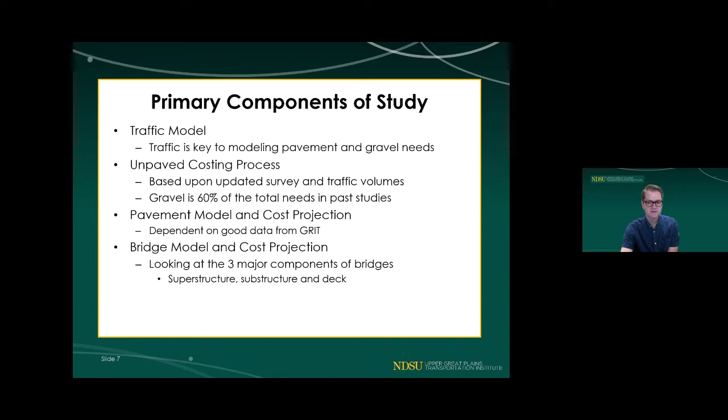Finally, the bridges across the state are analyzed to estimate the 20-year replacement and maintenance needs. The updated bridge analysis method focuses on the superstructure, substructure, and deck.

As mentioned in the previous slide, the impacts to all roads are dependent upon traffic levels. First off, for unpaved or gravel roads, more traffic results in more frequent blading, more frequent gravel overlays, and greater thicknesses when they occur. And in the higher volume roads, we see utilization of dust suppressant and base stabilization. So it's all a function of traffic in terms of maintenance. The paved roads, again, the design of the road is based upon projected equivalent single axle loads, or ESALs.

This is a measure of pavement damage due to axle loads, which is why the truck numbers are critical. The more ESALs on a road during its 20-year design life, the thicker the pavement is required. Additionally, for existing roads, the traffic estimates are used to deteriorate the current pavements based upon current condition and structure until an improvement is required.

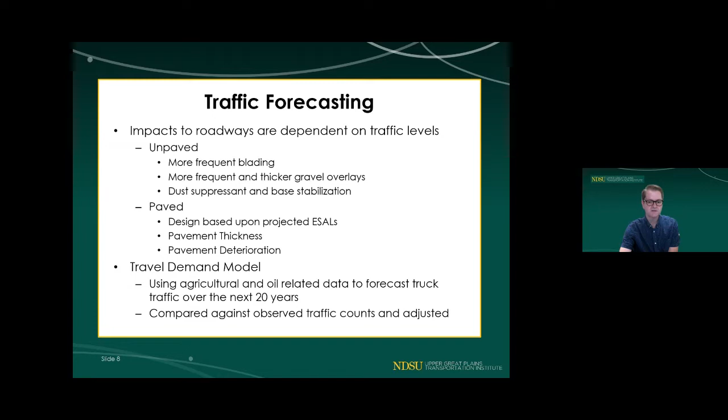The counts were collected by UGPTI staff, consultants in Western North Dakota, as well as merged with the counts that North Dakota DOT takes across the state off the state system on county roads. The study utilized a total of 1,718 counts across the state to calibrate the travel demand model.

As previously mentioned, the travel demand model focuses on two major commodity groups, agricultural movements and oil. In the ag model, we consider the top 9 commodities by volume in North Dakota. The North Dakota Department of Agriculture collects monthly elevator shipment data by commodity, which provides excellent information about the farm or farm storage to elevator movements, destinations from producers. In addition, we consider processors such as ethanol plants, crushing plants, and mills as destinations as well.

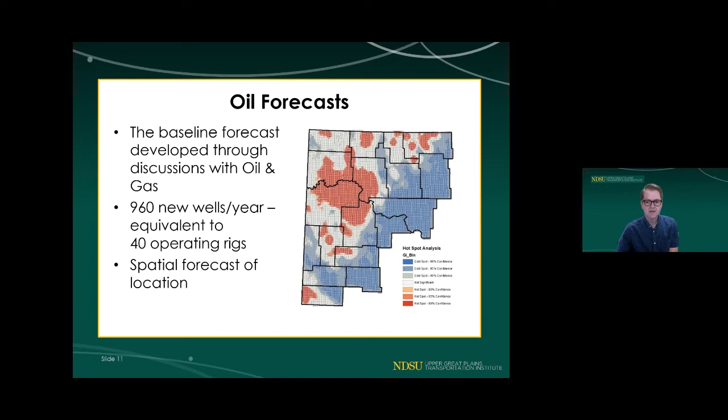The graphic on the right is the initial result of our spatial analysis of existing oil wells. The red areas, it's called hotspot analysis, which measures clustering. So denser areas of wells here are shown in red. And these spatial models are used to estimate locations for future wells.

On the ag side of things, again, we have NASS data that provides us the most current production year. But the forecasts are a little more straightforward for ag traffic. The overall acres in production change slightly from year to year, mainly due to weather conditions, if we have a really wet year, some is out of production due to flooding, but also due to acres of CRP expiring. However, the changes in the mix of crops produced in these acres have a more significant impact in terms of traffic. For example, a shift from an acre of wheat to corn results in much more truck traffic, both on the inputs in terms of fertilizer, but more primarily in the outputs in the yield per acre.

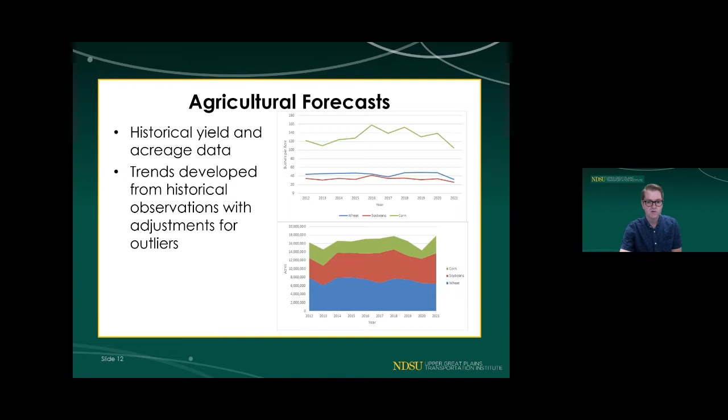And one note on the trends here, you can see, of course, 2021 was a dry year in North Dakota, a drought year. So the yields for all the commodities decreased. But overall, if we remove that from our trend line, we can see we have increases in corn and wheat yields over that time period as well.

So once we have the traffic volume estimates, the impact analysis can begin. For unpaved roads, maintenance practices vary based upon traffic volumes. A large volume of data is collected to determine and estimate the costs of these maintenance practices at these different traffic levels. Much of this data is collected through a series of surveys to counties and townships across the state.

In the two previous studies, we've formed a steering committee of county road supervisors to help provide input on and to improve the survey, both in terms of easier clarifications, making it easier to answer, but also to reflect new and emerging practices that are becoming more widespread for gravel road maintenance. In addition, for this study, we also added a panel of township officers to provide input on the township survey as well.

The gravel survey itself asked questions on component costs, type of aggregate and maintenance practices at different traffic levels. But first off, for the aggregate characteristics, we ask whether a county uses gravel or scoria, and other questions about gravel processing. Two we mentioned here are whether they use specifications or they test gravel as well. This helps us in a couple of different areas. It helps to reconcile the practices that are being used, but also to reconcile differences in costs from county to county as well, as additional processing will add costs to the gravel.

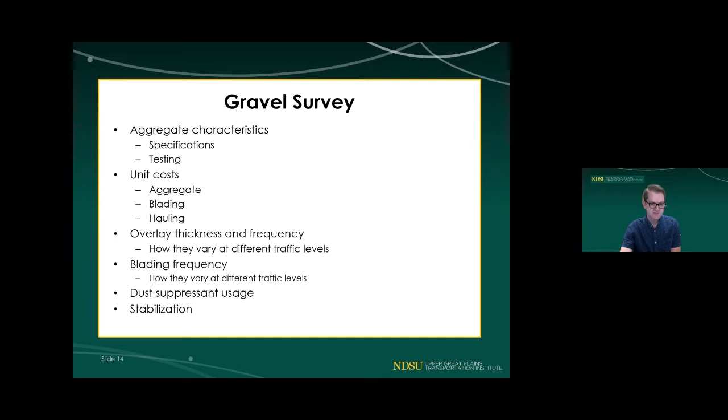For each of these traffic levels, we asked counties to report how often they would blade the roads, as well as how many years between re-graveling and how thick of a gravel overlay they'd apply at different traffic levels. Additionally, they're asked about the use of dust suppressant and base stabilization usage at different traffic volume categories as well.

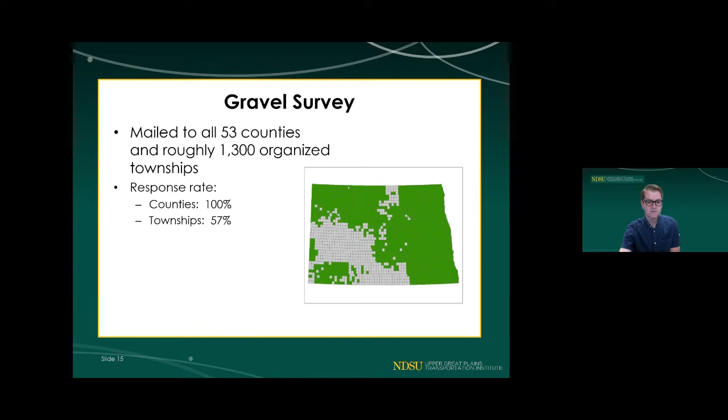The gravel survey was mailed to all 53 counties and roughly 1,300 organized townships, and the green townships shown on the map are the organized, the gray are unorganized townships. We received all 53 of the county surveys back, a 100% response rate, and roughly a 57% response rate from the townships. The survey results then are used to calculate a county-specific average annual cost per mile by traffic level. So for each of those categories they reported, we convert that into an average annual cost.

Since these estimates are county-specific and the surveys came from individual counties, we can account for regional variations in a variety of things, including the gravel costs. So the cost of aggregate varies from county to county, region to region, as well as, depending upon the location, the average length of haul from the pits to the roads can vary from county to county as well. And the trucking cost can be a significant component of the overall gravel cost, depending upon the location and availability, as well as the maintenance practice variations from parts of the state.

Blading practices in Southwest North Dakota are far different from Northeast North Dakota. So the survey allows us to apply the practices that the counties are actually using in their counties and estimate costs using those practices. In the analysis, we group miles by traffic levels: very high, high, medium, low, and very low. And each of these have an annualized cost associated with them. So we apply those to each traffic level and then sum up the mileages across the jurisdictions to provide the needs estimates.

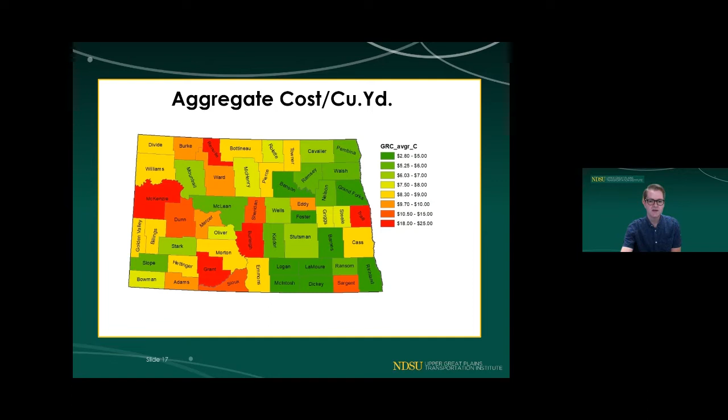With that, I'll turn it over to Brad Wentz, Program Director, for discussion of the paved analysis. I'm going to talk about the pavement analysis that was done for the needs study.

We'll talk about the three different phases in it: the data collection, where we collect pavement condition data, and we also collect the GRIT data from the geographic roadway inventory tool that's coming from county data, and get the existing conditions. And then we have a data analysis process using an AASHTO 93 pavement design model routine to determine the costs and the improvements that are needed. And then I'll cover a little bit on the pavement results that we got from the study.

So as for pavement data collection in 2021, we did it similar to previous years, collecting the condition data. This year we used a smartphone application called Road Bump and traveled the south half of the state. The photos on the screen indicate we were in a sedan out there traveling the roads with students that passed over the roads, and then the smartphone devices were mounted in the center console of the vehicle to collect the data. Again, we collected the south half of the state in 2021, and then we will collect the north half in 2022, and that'll be coming up this fall.

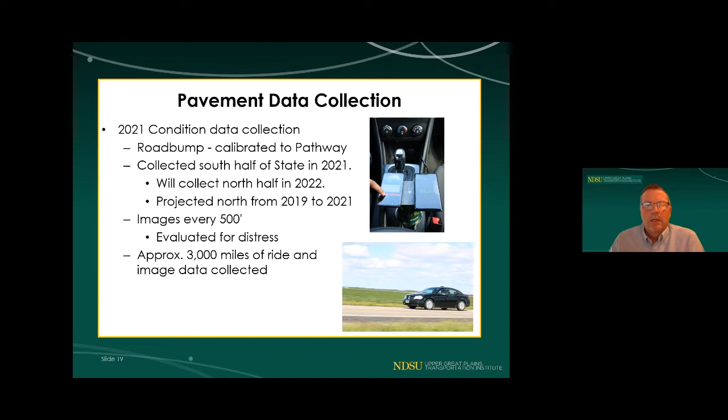This was done using a roadway image capture tool that we developed at UGPTI. So we have the images that we can go back and evaluate for the distress. The smartphone device only collects the ride variation of the road, and we have to visually look at the road to see how many cracks are there and what the distress score is. And then we combine the two for a combined PSR value that we use in the study. There were about 3,000 miles just in the south half of the state that we collected, and again we're projecting the rest of the data for the north half.

Like I mentioned, the Road Bump collects IRI data. That's an International Roughness Index, which we then convert into a present serviceability rating, or PSR score. That's a 0 to 5 score. But the Road Bump is using an accelerometer in the smartphone, and that's a little different than the North Dakota DOT pathway van, which uses an actual laser to measure the roughness of the road. So we did a little calibration process running several state highways that the North Dakota DOT ran with a pathway van, and then we calibrated that to come up with a calibrated value that would be used, so it's similar to what the pathway van collects. The graph indicates that we were able to get a pretty good match from that calibration process.

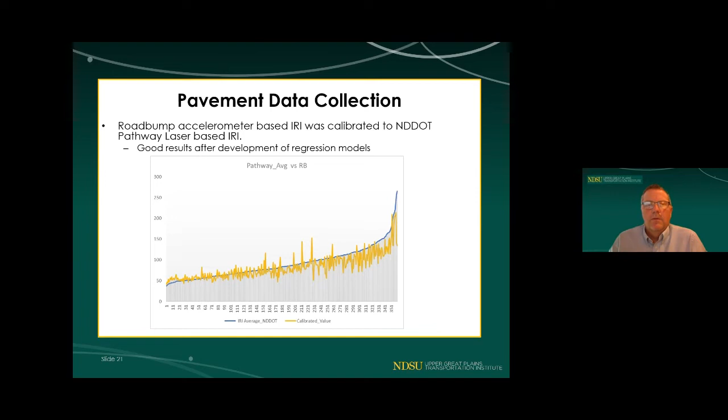And then these next three maps really show the results of that data collection for the ride and the condition data. The colors on there indicate red is poor, fair is orange, and green is indicated as good. And then the background on the counties indicates the pavement mileage. So the darker the color, the more pavement miles are in that county; lighter, the lesser amount. And you can just focus in on your counties.

It's a little hard to analyze this whole thing in this little presentation, but if you want to look at your county and see how those results look, these maps are also going to be posted on our website in the results area, so you can come back and look at them a little closer and see if it matches what you think is going on out there in your county.

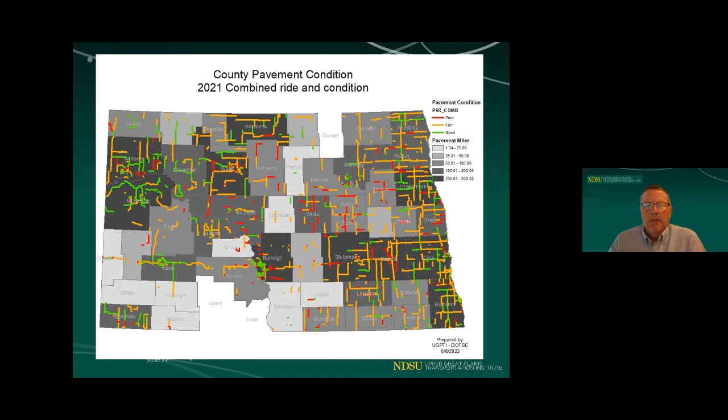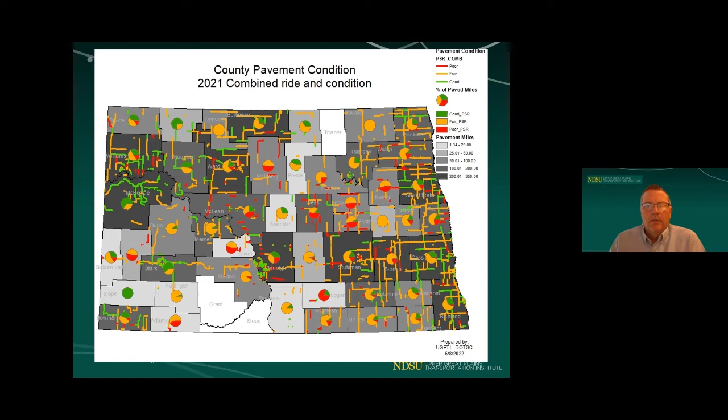And then this next map includes a pie chart to show you the percentage in your county of good, fair, and poor. You can look at that and also compare it to other counties and see as a whole what your county is doing as far as the percentage of your pavement condition. And then the last one here takes off the road, so you can see the pie charts a little bit better.

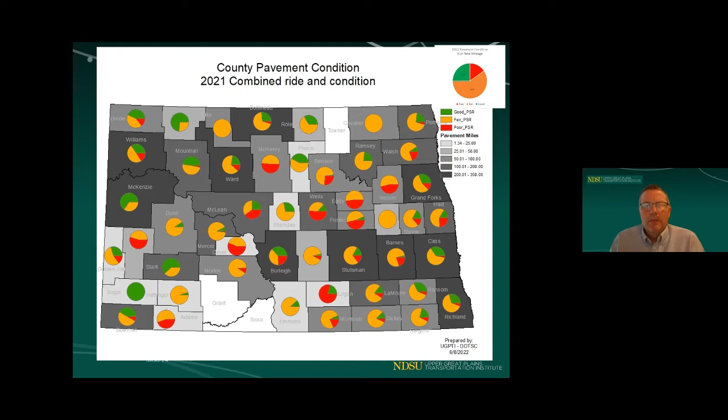And then also as a statewide average pavement condition for all the roads in the state, all the county roads. So you can use that to compare how you're doing as compared to the whole state. So like I said, you can look at your county a little bit, but there's not much time here, so you probably want to look at it on our website when we get these maps out and available in the report.

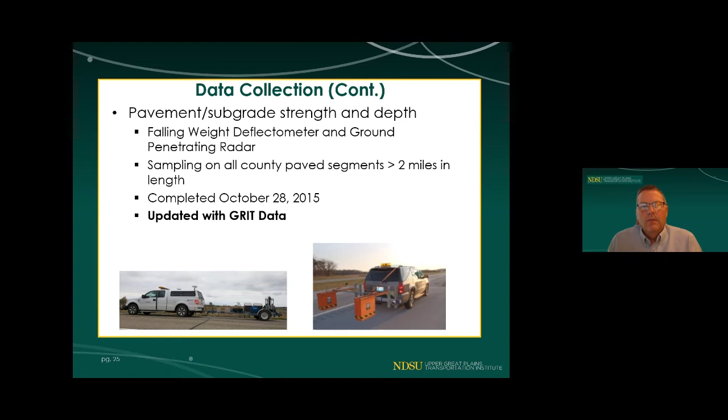So the other data collection, pavement and subgrade strength and depth, that was done back in 2015, where we ran a falling weight deflectometer and ground penetrating radar to get the strength of the subgrade and then the thicknesses of the pavements and stuff, because we didn't have all the GRIT data at that time, so we had to run that device. We've got most of the roads, but since then we've had GRIT in place, and so we update all that strength and depth information with the GRIT data.

And speaking of GRIT, I'm sure most of you have heard of GRIT. Almost all counties are using it in North Dakota and updating their information. GRIT was kind of specifically developed just for the needs study to collect data which we didn't have available, or data that we couldn't collect. So stuff like pavement thicknesses and age and things like that. But we've added a lot of functionality to it just for the county's benefit.

It's a really pretty easy to use web map based inventory tool. So you just hit our website and you can go right into it and log into your county and edit data. Also a lot of tools for viewing the data. Again, it's available and in use by all the counties in North Dakota. We have 4 layers of information.

The construction history is the one that was initially intended to collect the data we needed for the needs study, and then we added stuff so counties could put in their 5-year plans, their construction planning information, minor structures, load restrictions, and we've added several items since then like pavement condition forecasting and others. The link on there is to go to the GRIT homepage.

Some of the data that we actually need for the needs study is coming out of GRIT. The big one is the structural number, or SN. That is the number that's telling us how much strength we have in our roadway to carry the traffic that we have on it. So from GRIT, we're getting the pavement thicknesses and the type of pavement, and we're getting the base. There's a top base and a bottom base thickness that we will get, and the type of base.

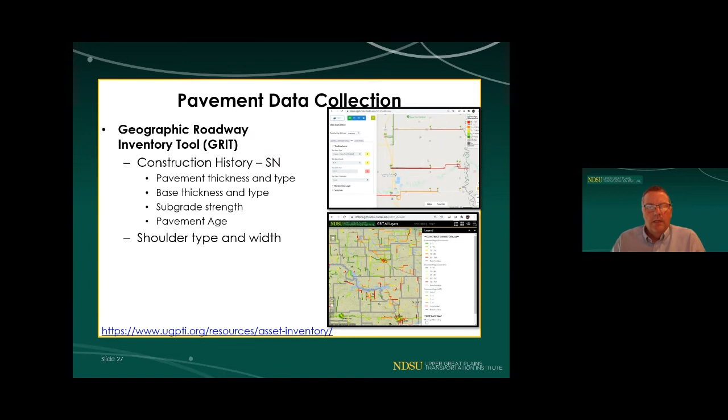And then shoulder type and width, we also use to determine if we're going to do a widening project, or sometimes a road needs to be reconstructed just because it's too narrow. So we also use that in the data. For the analysis, again, we're using the AASHTO 93 pavement design model that we developed in a SAS routine.

Some of the design inputs for that model include the pavement serviceability rating, or PSR, that I talked about. That's the initial pavement condition of the roads, so that's what we've collected. And then cumulative ESALs, where we're getting the truck traffic. Al mentioned that previously in talking about the traffic model, so we're getting the ESALs from there. And then structural number, again, that's the roadway strength, and we're getting that from the GRIT information.

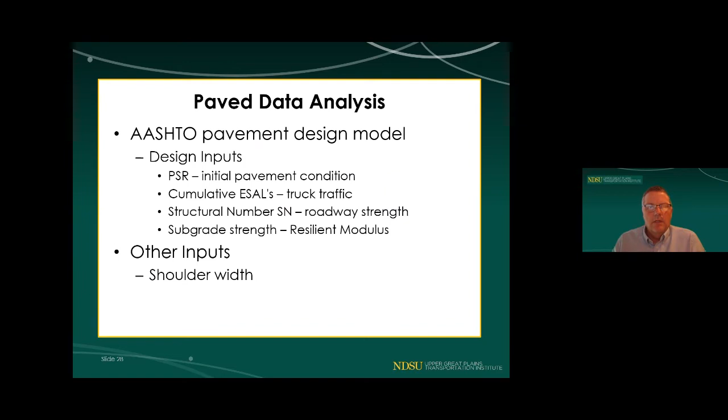Subgrade strength is a resilient modulus. It's the unit that tells us what the strength is of that subgrade. And then shoulder width was the other input into the model. So these next couple of maps, I'm just showing some of those inputs on a color-coded map, so you can kind of see in your county what that data is looking like. And this first one is the equivalent single axle loads, cumulative ESALs over 20 years.

And then the next one is structural number. And this, again, you can kind of see the red is indicating where it's a really pretty low structural number, up to 2, and then the green is a much higher structural number. So you can see the greens are kind of out in that oil country again, where you have the high ESALs, and that would make sense. So the higher the ESALs, you're going to need a higher structural number for the roadway to handle that traffic.

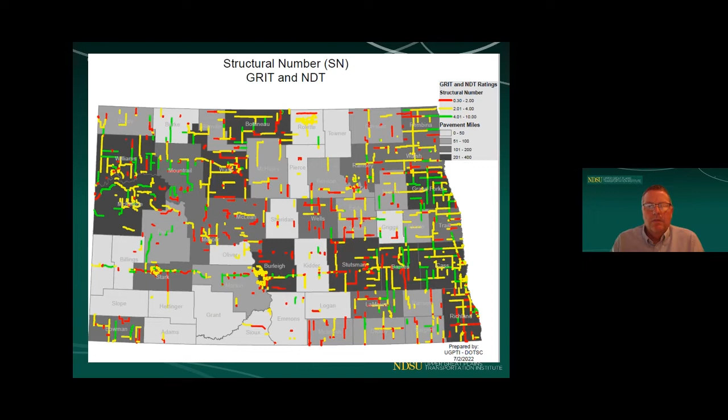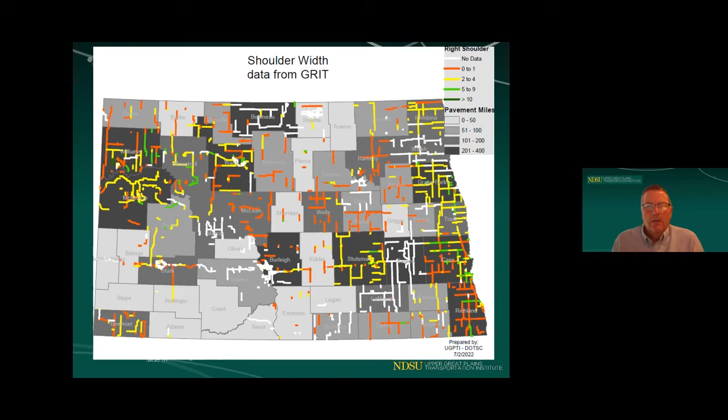And then the last one here is just showing shoulder width data that we have from GRIT. The red or orange is 0 to 1, and the white color on here is indicating where we didn't have any data entered into GRIT. So this is kind of a little plug for counties to try to make sure you get your shoulder width information into GRIT if possible. We have to just make an assumption for those roads where we don't have it. We do review the images that we captured to try to get a better guess at what those would be, but it is important for you to get in and have that information entered into GRIT.

So we did look at a lot of data to try to come up with how much it has increased. Inflation has really gone pretty high here lately, but one of the sources was the National Highway Construction Cost Index, put out by USDOT, and that showed about a 12% increase over just about a 2-year period up to Q3 of 2021. And then we also looked at the Associated General Contractors, who have some information on their pricing for bid projects, and also the input pricing for things like building construction.

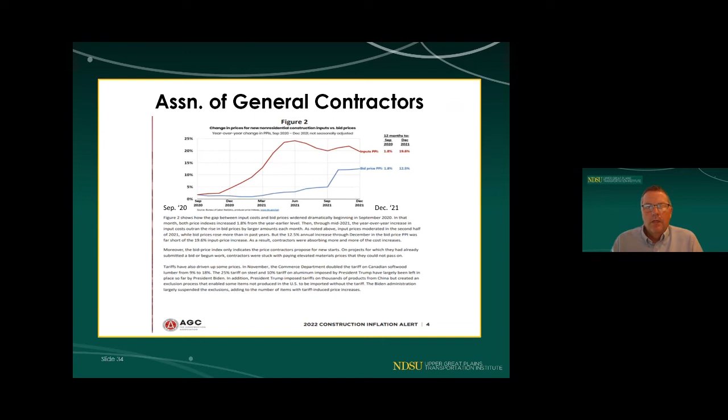And then finally, this is a map showing the types of improvements that were put out by the model, and you can see the majority of it is overlays. The whole model is really set up to maintain the system, so you don't generally get a lot of reconstruction unless it's got a really poor subgrade, it's really narrow, and it's got a lot of truck traffic on it. So you'll see quite a bit of reconstruction up in oil country again. That's just because of the very high ESAL loadings that they have up there, but there are different construction projects spread out through the state.

So these maps will be on the website, so you can take a closer look at your county and kind of where it fits in on this. And then we'll be talking about the costs a little bit later and summarizing what those are.

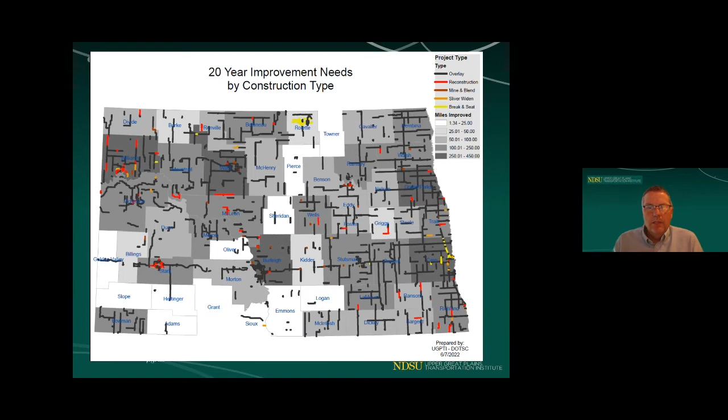So that's it for the paved analysis, and I'm going to turn it over to Kelly Bankston to talk about the bridge needs analysis that was done. Okay. Well, thanks, Brad. My name is Kelly Bankston. I'm the bridge and pavement engineer here at Upper Great Plains Transportation Institute. I'm a retired county engineer.

I was in on the tail end of the previous needs study in 2020, and I had the pleasure of working on this entire study, and it's been a good learning experience. I've been able to work with a lot of great people here. So I'll be going over the bridge needs data and analysis of this study. So we'll jump into it here.

The bridge data sources are from the Federal Highway Administration's National Bridge Inventory System. We dig into the 2020 and the 2021 bridge inspections and get all of the condition codes of the bridges on the North Dakota local road system. So we started out looking at 2,996 structures, and then according to the policy here, we extracted out the box culverts. There were 479 of those, and we also take out the bridges that are on minimum maintenance roads as well. This study has 53 more structures, bridges analyzed in it than the last study.

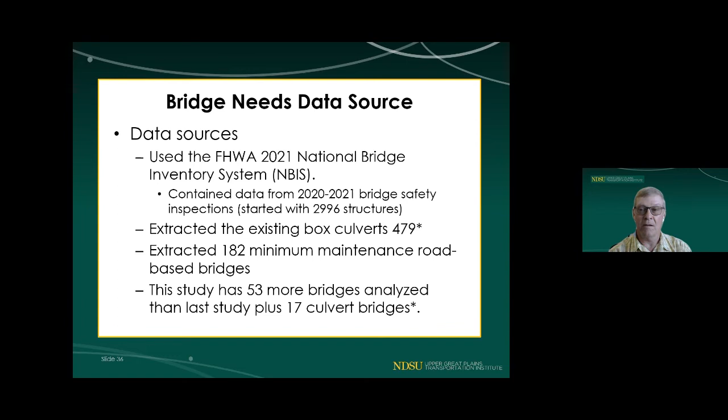We also did a separate analysis of culvert bridges, and I'll be getting to that in a minute. So there were 17 of those added into the needs totals as well. The bridge analysis methodology: the priority items are, of course, the bridge deck, the superstructure, and the substructure condition codes, all from the NBI. So if those are at a 4 or less, those structures are going to be drawing replacement needs. We also concentrate on the structurally deficient bridges. All on and off system bridges are looked at, provided that they're on maintained roads.

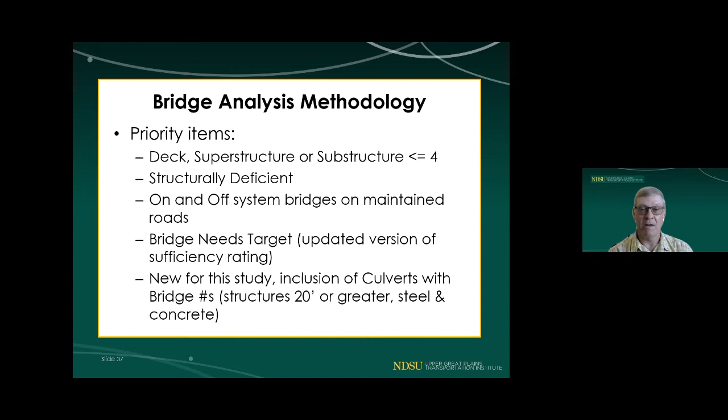We developed the bridge needs target, which is an updated version, more or less, of the sufficiency rating. And new for this study is the inclusion of culvert bridges for structures that are 20 feet or greater and made of steel or concrete. So the NBI is no longer tracking sufficiency rating. They have not done that since the 2016 data that they provided. Since then, many states have developed their own new or updated rating guidelines.

So we visited with some neighboring states and looked at our sufficiency rating calculator that we had on hand here at UGPTI. And it was decided to include some special reduction factors for scour critical bridges, fracture critical bridges, bridges that are load posted, and bridges constructed from timber materials. And so this is referred to as the bridge needs target. It's for needs purposes only. The threshold for replacements is a BNT of less than 75, whereas previous studies have been using a sufficiency rating of less than 80. We did a comparison, and there was good correlation using these thresholds.

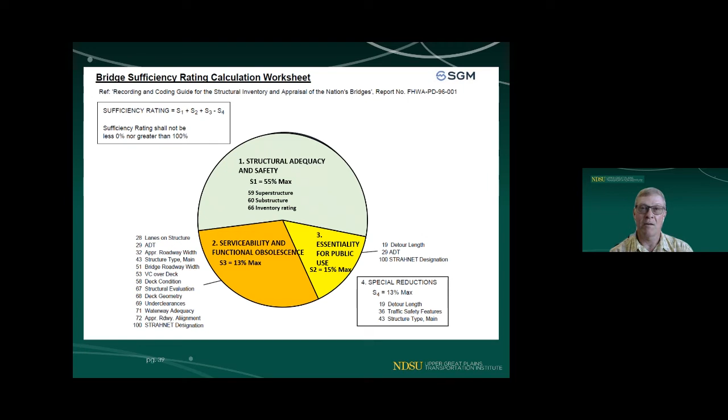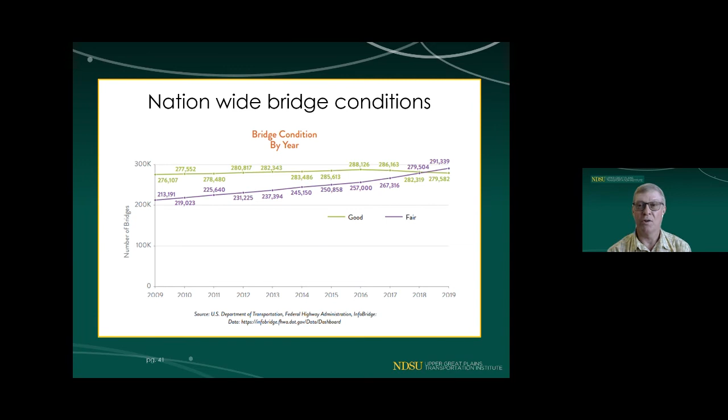So on the nationwide picture, bridges in fair condition began to exceed the number of bridges in good condition in about the year 2019. That's shown on this graph here, where the purple line is bridges in fair and the green is bridges in good condition. So we're seeing a similar trend here with North Dakota local government bridges, where in 2020, the number of fair bridges started to ramp up and the number of bridges in good condition started to decline.

There is some good news, and that is that there's 110 fewer bridges posted for load in the 2021 NBI data compared to the 2020 NBI data, which was 684. So now that's down to 574. So there's been some progress made on bridge replacements in the field in North Dakota.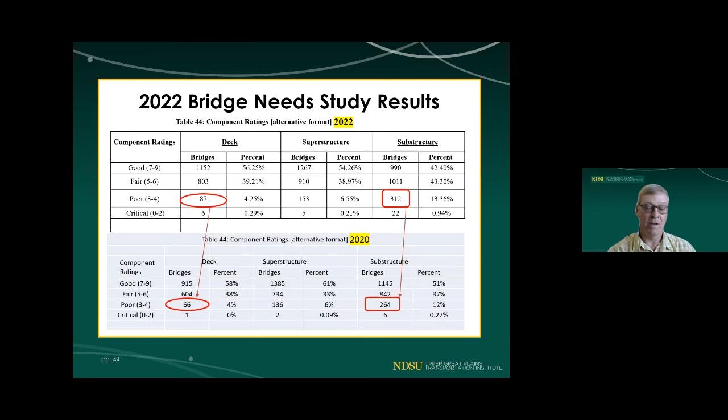You'll note that on this slide, there were 66 bridges that had poor deck ratings in the previous study, and now that's up to 87. So that's an increase of 32%, a significant increase. Super and substructure criteria is also seeing increases, and the new reduction factors for scour, fracture critical, timber, and load rating in the bridge needs target is also a contributing factor in these changes.

Part of the study requires that we also look at replacement costs. So we pulled out bid abstracts from county projects for 2021 and 2022. We obtained these from the North Dakota DOT's website. And we also then include the approach grading costs, the preliminary engineering costs, and the construction engineering costs. And we found that the average construction cost for bridge replacements has gone from $295 per square foot up to $370 per square foot. So that's a 25% increase.

And we've also seen that the maintenance costs have bumped up a little bit from 30 cents per square foot on average to 35 cents. In addition, there's a lot of bridges being replaced with box culverts, and the multiple line box culvert is the most popular replacement method. These costs have been increased from $750,000 to $800,000 for the multiple boxes. The length ratio of new bridge structures has also gone from 1.7 times the length of the in-place structure to 1.8. So that is a factor on the overall cost as well. The width is remaining the same at 32 feet is what we're using in our projections.

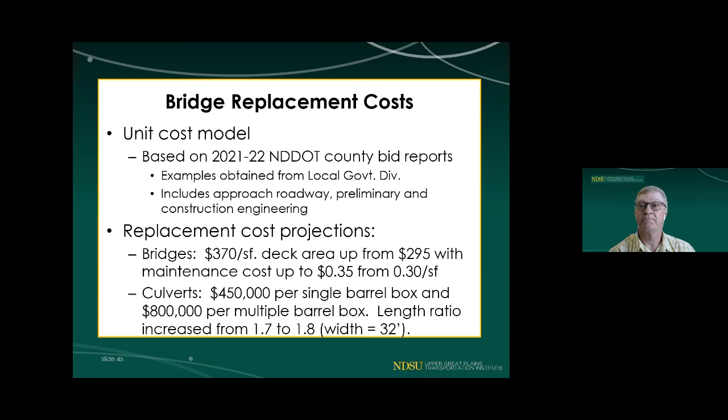And then I'll just touch base on the culverts that have bridge numbers. So there's 17 culverts that are included in the bridge needs analysis, and the culvert structures that are made of steel that had condition codes of a 5 or less, and the culverts built from concrete that had condition codes of 4 or less are included and based into the study report in the appropriate counties where they're located.

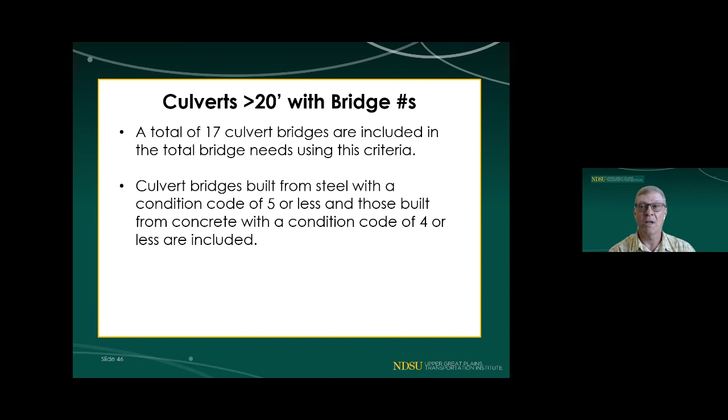The total bridge replacement needs for the 22 study comes out to be 698 structures compared to 625 from the previous study. This is down a little bit, showing some progress from the 2014 and 2016 studies where it was over 700. So there's been some progress made here, and that's the good news.

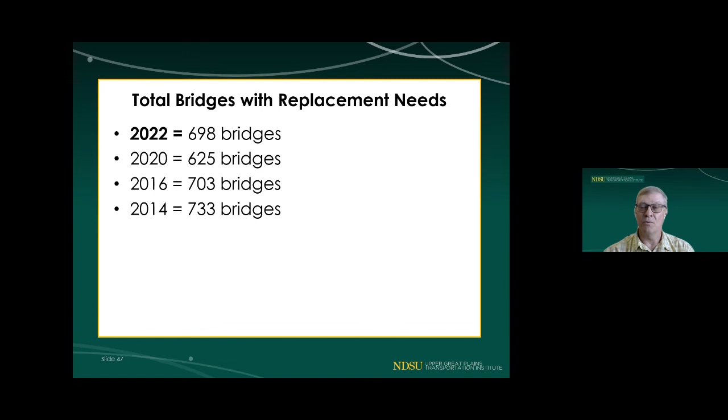Bridge maintenance costs were looked at, like I mentioned. So bridges not drawing replacement needs are drawing maintenance needs, and that's allowing for costs involving these practices, including deck washing, deck and crack sealing, and joint maintenance on the off-system bridges. And then on the on-system bridges, where there's ice control costs, also deck washing and crack sealing as well.

Rehabilitation has been removed from this study report, as most counties are replacing their bridges that are in poor condition. They're generally replacing them with multiple lines of box culverts wherever they can. The maintenance needs that's being generated for all the bridges in the study analysis does provide an offset to this change.

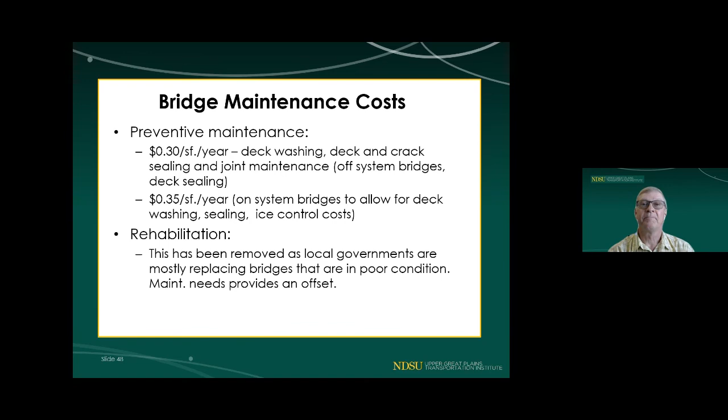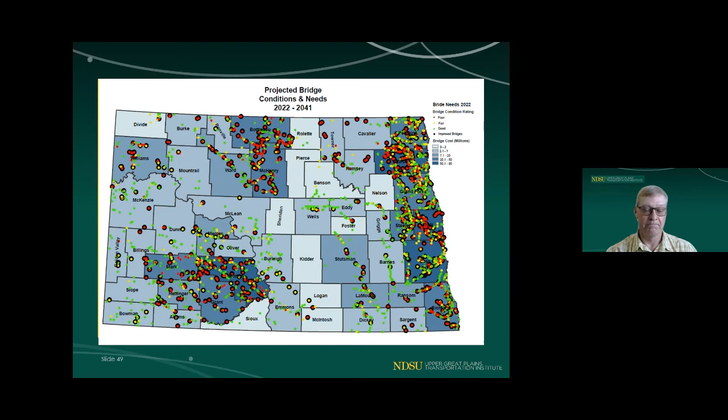So the needs estimates, I'll be turning it over to Al to go over the needs estimates for the rest of this study report. Thank you. All right. Now wrapping up the needs estimates for the county, township, and tribal roads and bridges. We're going to group those by individual categories. So we'll have the unpaved, paved, and bridges.

So for the unpaved analysis, we have a total of $6.5 billion over the next 20 years, and in the most current or the upcoming biennium, $656.16 million. And a little bit later, we'll do a comparison of this study to the previous one.

The paved analysis, $588 million in the current biennium for a total of $3.2 billion over the 20-year period. And note a lot of the paved needs decrease over time, as Brad had mentioned earlier, based on the conditions of the roads initially. So it would be repairing the roads in the worst condition first and moving it forward from there.

On the bridges, in the current biennium, $139.42 million for a total of $715 million. And you'll note for the first 5 biennia, the cost is the same. When we get into the initial analysis, the bridges that Kelly showed in poor condition represent somewhat of a backlog in necessary improvements on bridges across the state. Initially they would all be improved in the first year, but realistically, there's no way engineers and contractors could get those replaced in a short period of time. So those are distributed somewhat evenly across earlier timeframes. But the big takeaway is the 20-year need estimate of $715 million.

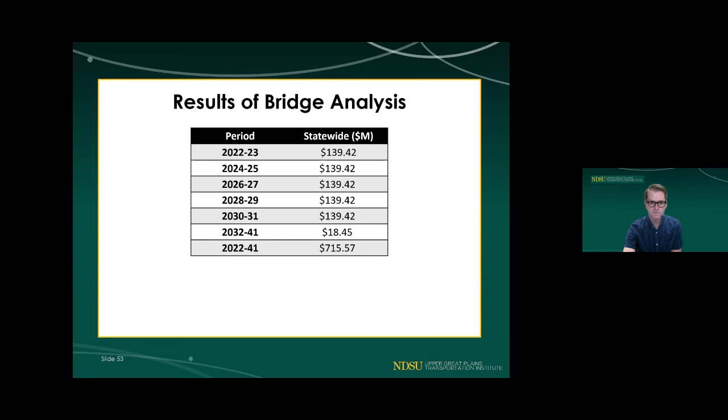Statewide, so combining unpaved, paved, bridges, and the total. So total over 20 years is $10.513 billion, which is shown in the lower right-hand corner of the table. And the top right, we have the biennium estimate needs of $1.3 billion.

Now, how does this compare to the previous study? We've talked a little bit previously about increases in unit costs. So those are somewhat shown in the next graph. The column on the left represents the previous study's estimates. So unpaved roads, $6.0 billion. The new study, $6.5 billion for an increase of 7.4%. This is primarily driven by some regional increases in aggregate cost, but also the hauling cost, which I referenced before, due to fuel prices. Previous study, we were around $3 per gallon for diesel. Now we're around $5. So there's a significant increase related to that.

The paved numbers are up 23.35% from 2.6 billion to 3.3 billion, primarily due to the cost increases for components and bid prices that Brad mentioned previously, as well as some pavements that were previously improved now have deteriorated to the point that over the 20-year period, they require another improvement.

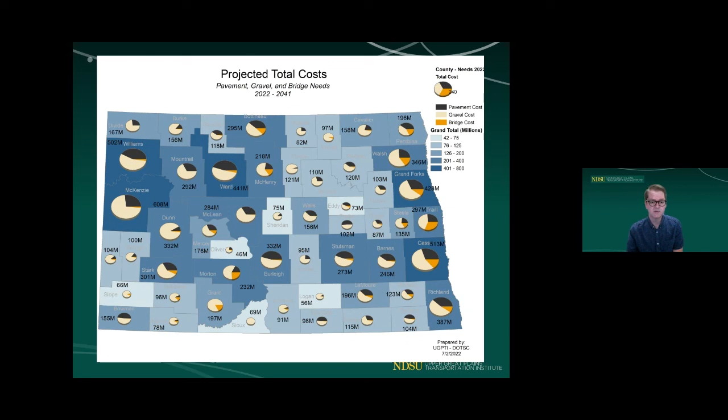And the individual pies themselves are broken into three colors, black representing pavement, tan representing gravel, and orange representing the bridges. And this information, as well as other graphics and illustrations that were presented earlier, will be presented on our website, which I'll show in a couple of slides.